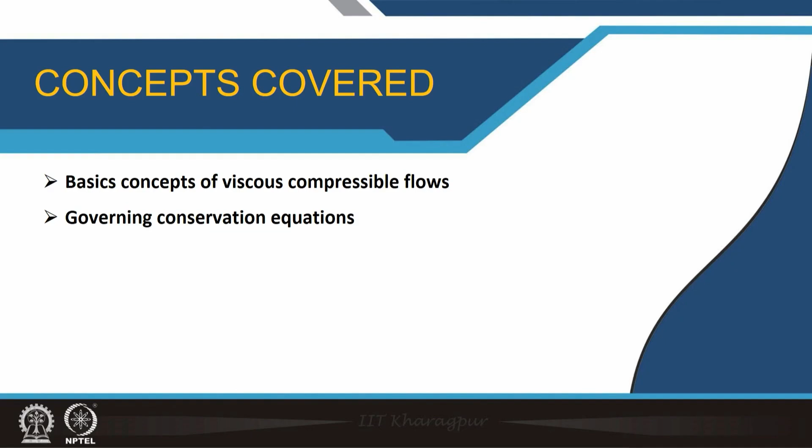With this lecture, we will begin week 4. We are going to look at the viscous compressible flow equations in this lecture. We are going to look at some basic concepts to begin with, and then we will move on to the governing conservation equations.

Before we move on with lecture 16, let us look at the topics of week 4. We will be looking at the governing equations of viscous compressible flow at length, and then we will derive the compressible boundary layer equations. We will discuss aerodynamic heating, and we will also look at shock wave boundary layer interactions.

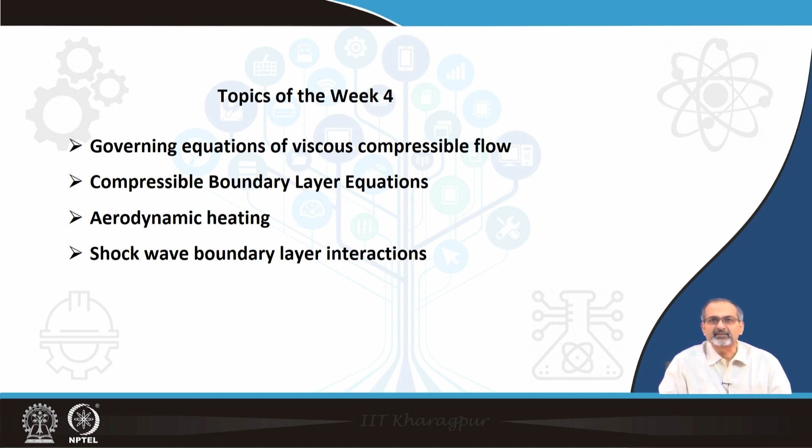To begin the topic, let us recall that at supersonic Mach numbers, the aspect of aerodynamic heating is insignificant. As the Mach number becomes larger, moving to the higher ranges of supersonic Mach numbers into the hypersonic or hypervelocity regimes, aerodynamic heating becomes very significant.

However, both aerodynamic heating, that is high vehicle skin temperature, and shear stress, that is high skin friction drag acting on the surface of the vehicle, become severe at hypersonic conditions. This is a significant point which distinguishes the hypersonic and hypervelocity regimes from the supersonic one.

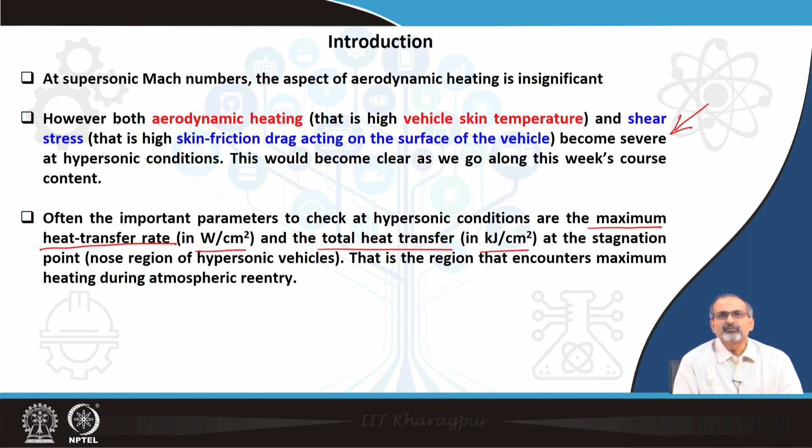This would become clear as we go along this week's course content, as we develop equations which address this issue. Often the more important parameters to check at hypersonic conditions are the maximum heat transfer rate given in watts per centimeter square, and the total heat transfer in kilojoules per centimeter square at the stagnation point, that is the nose region of hypersonic vehicles.

That is the region which encounters maximum heating during atmospheric re-entry conditions. Having taken note of these points, let us look at the shape of the vehicle. Why should the shape of the vehicle matter, and matter more so at hypersonic Mach numbers? Let us have a look at how it makes a difference.

A hypersonic wave rider is conceived as a hypersonic cruise vehicle configuration. This is more of a slender configuration. It needs a high value of lift to drag for efficient long range cruise, and it has a slender shape. These vehicles do not encounter very large wave drag, because if you have a slender shape, irrespective of the Mach number, the wave will not become a very strong bow shock or normal shock, and therefore the wave related drag may not be so high.

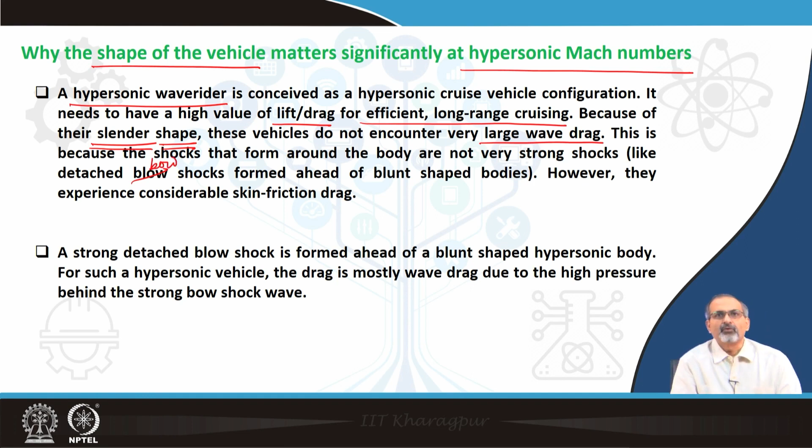The shocks formed around the body are not very strong, but not of the detached bow shock kind, which is formed ahead of blunt shaped bodies. However, such slender vehicles experience considerable skin friction drag. So if you have a slender body, the wave drag may not be so significant, but the skin friction drag becomes very large as free stream Mach numbers become large.

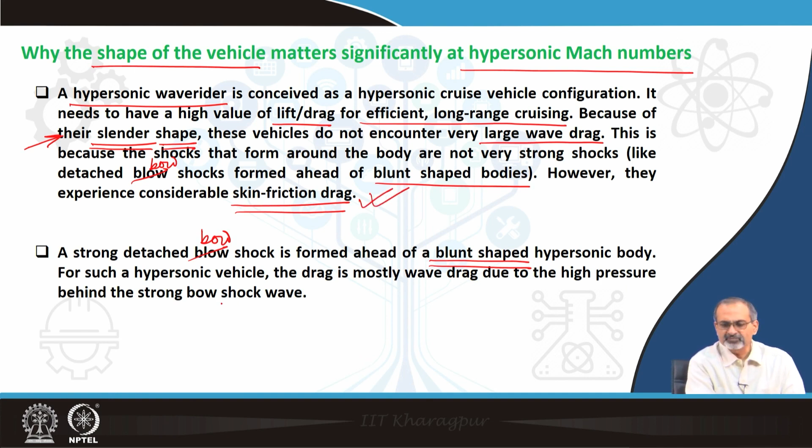A strong detached bow shock is formed ahead of a blunt shaped hypersonic body. For such a vehicle, the drag is mostly wave drag due to the high pressure behind the strong bow shock wave. So this is how a blunt shaped and a slender shaped hypersonic body respond to the flow. For the slender body, skin friction drag is significant; for the blunt body, wave drag is significant.

Low Reynolds number and high Mach number are basic ingredients of hypersonic viscous flow. High Mach number is of course evident, but we have not discussed the low Reynolds number aspect of hypersonic viscous flows. Let us initiate the discussion on that aspect.

Viscous dissipation and consequent heating. Let us try to understand what viscous dissipation is all about and how it is connected with aerodynamic heating. A hypersonic flow contains a very large amount of kinetic energy, due to a very high free stream velocity, which we are already aware of. Now when this flow occurs over a wall or vehicle surface, it is slowed by the viscous effect which occurs within the boundary layer formed adjacent to the wall.

So when the flow occurs, all actual flows manifest the viscous effect within a boundary layer formed adjacent to the wall or surface of the vehicle, where essentially the flow comes to a halt next to the wall. While within a very short distance, which we typically indicate as boundary layer thickness, the velocity goes from zero to a very high free stream velocity, which we generally indicate by u infinity.

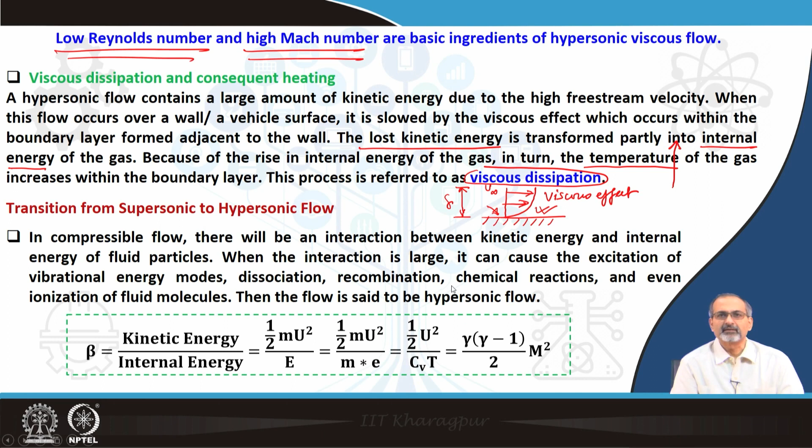This is a very important term in high speed flows. You have to remember it very meticulously.

Now recall, in an earlier lecture in week 1, we were talking about transition from supersonic to hypersonic flow, and we had introduced this parameter beta, where we said it is basically a ratio of kinetic energy and internal energy. If you put the respective expressions for it, this is how it will work out, and then here it is in a specific internal energy sense, and you replace it by the specific heat at constant volume times the temperature, and thereby finally come up with an expression which is dependent on gamma and the Mach number of the flow, the square of the Mach number importantly, which means this beta is going to increase quadratically with Mach number. As Mach number goes up, it is going to non-linearly increase.

Of course, gamma would also have some bearing with Mach number. Even if you consider it to be constant, you see a clear quadratic relationship between beta and M.

Now, in compressible flow, there will be an interaction between kinetic energy and internal energy of the fluid particles. When the interaction is large or severe, it can cause the excitation of vibrational energy modes, dissociation, recombination, chemical reactions, and ionization of fluid molecules which are there in the gas, and this is another very major aspect of aerodynamic heating. We are going to discuss more of this in the later lectures, the reactions part of the flow.

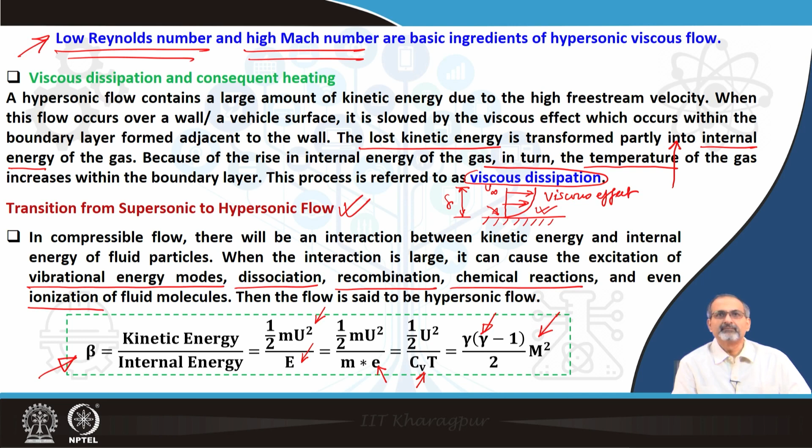So we made a comment in the previous slide, if you recall, right at the top of the slide we said low Reynolds number, and that could also mean largely laminar flow. Now, with a thicker boundary layer here, we will try to understand the other implications in due course, but before we go ahead, let's have a quick look at the Sutherland's law.

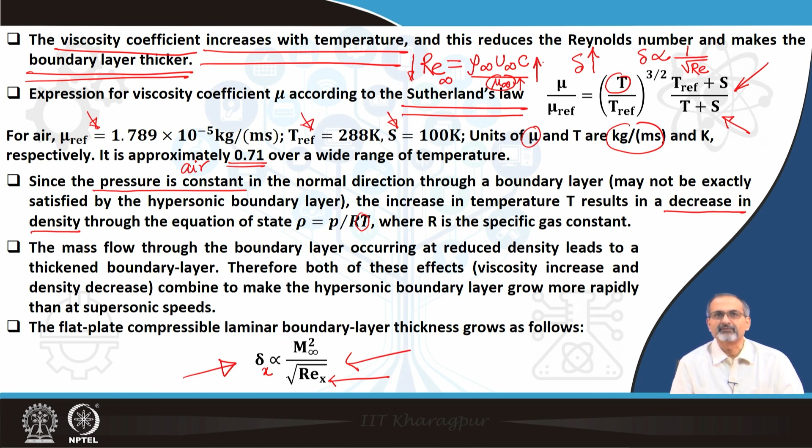The thick boundary layer in hypersonic flow produces a strong displacement effect on the inviscid flow which lies beyond the boundary layer. So, there comes a very strong displacement effect.

Now, as you know, when the flow is developing on a flat surface like this, this is the boundary layer thickness, and this is how it is growing gradually. You can also calculate the displacement thickness corresponding to this boundary layer, and that is of a lot of significance in terms of figuring how far the boundary layer flow displaces the outer inviscid flow, and that is precisely what is emphasized in this point.

A large displacement thickness causes a given body shape to appear much thicker than it actually is, because if the body shape is defined as y equal to f(x), when it is immersed in a viscous flow, the y as it appears to the flow would not be f(x) alone, it would be displaced by an amount of this order. So there will be a displacement thickness adding on to the geometric shape of the surface, and that displacement thickness is also a function of x, the length from the leading edge of the body. So, it appears thicker than it actually is.

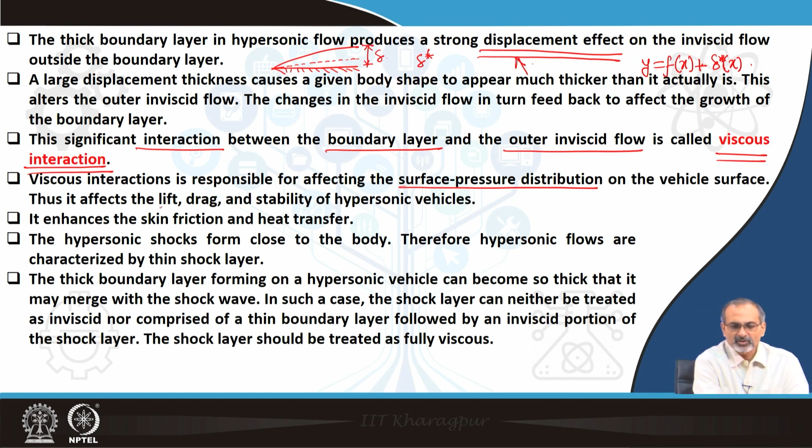Viscous interactions, how do they affect things? They are responsible for affecting the surface pressure distribution on the vehicle surface, and consequently, if you integrate an altered surface pressure distribution, you will see a change in lift, drag, pitching moment, and therefore stability of the vehicle. It also enhances skin friction and heat transfer.

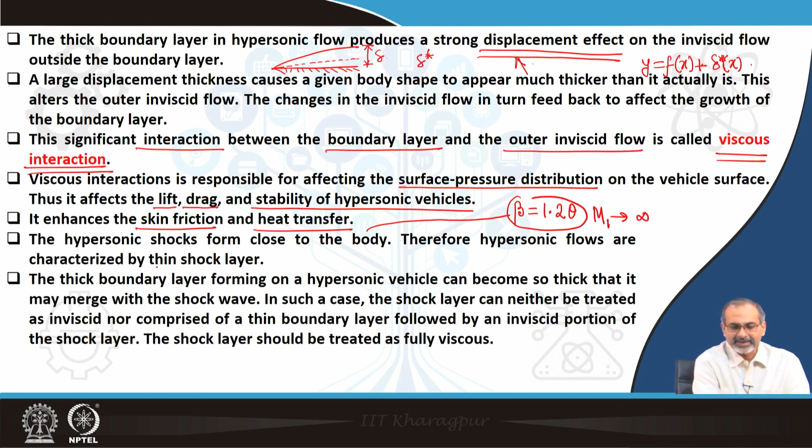The hypersonic shocks, which are known to form very close to the body, in this context you may recall the other day we were talking about beta being of the order of 1.2 times theta in the limit M1 tending to infinity, which basically indicated that the shocks form very close to the body. Therefore, hypersonic flows are characterized by thin shock layers.

Now, when you have a thick boundary layer forming on a hypersonic vehicle and it becomes so thick that it may merge with the shock wave, in such a case the shock layer can neither be treated as inviscid, nor comprised of a thin boundary layer followed by an inviscid portion of the shock layer, because the shock layer should be treated as fully viscous in that case.

So, what we are talking about is that if you have a body immersed in a hypersonic flow with a very thin shock layer between the shock and the body, while you have a significantly thick boundary layer forming on the body, then it may so happen that you do not have the shock layer in the inviscid form anymore. So even the inviscid equations that we use to analyze the shock relations and so on become questionable, because it is highly affected by the viscous effects of a much thickened boundary layer.

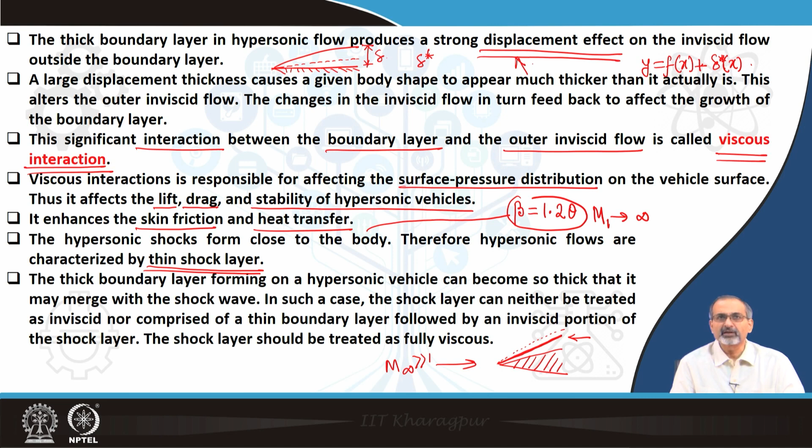This, of course, is shown in a highly amplified manner, where the boundary layer thickness is way larger than the shock layer, but the point we are trying to make is that they could be of the same order.

From altitude velocity maps, we can show that laminar flow occurs at higher altitudes and turbulent flow at lower altitudes. So, what are these altitude velocity maps? We are going to visit them in detail in some of the later lectures.

When we look at re-entry bodies typically re-entering the Earth's atmosphere, they move through the entire thickness of the atmosphere till they land on the surface. This altitude could be of the order of 100 kilometers or more, and velocities are much higher at that altitude, coming very close to zero by the time it touches down, which means at higher altitudes you have much higher velocities.

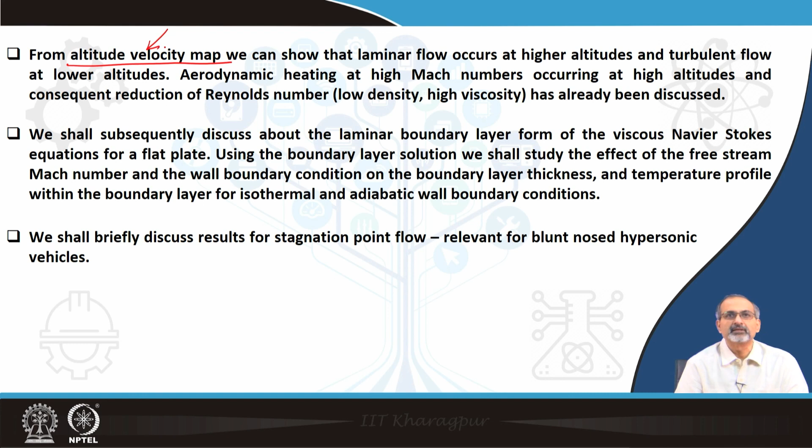The velocity is reduced as the altitude reduces, and therefore you could generate altitude velocity maps. Through suitable calculations, we can argue that mostly laminar flows would occur at higher altitudes and turbulent flows would occur at lower altitudes. Now, aerodynamic heating at high Mach numbers occurring at high altitudes, and the consequent reduction of Reynolds number due to low density and high viscosity, has already been discussed.

We shall subsequently discuss the laminar boundary layer form of the viscous Navier-Stokes equations for a flat plate. Using the boundary layer solution, we shall study the effect of the free stream Mach number and wall boundary condition on the boundary layer thickness, and the temperature profile within the boundary layer, for two different kinds of thermal boundary conditions, namely isothermal and adiabatic wall boundary conditions.

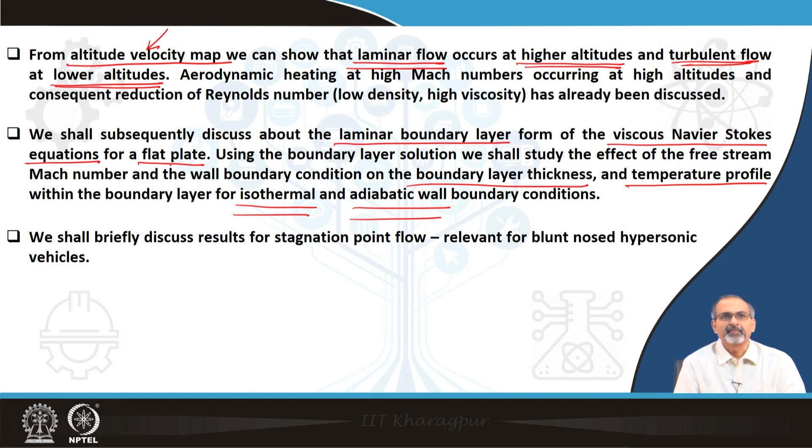So for that we have to derive the laminar boundary layer form of the viscous Navier-Stokes equations, which we will take up soon, and we will confine it to the flat plate case. We shall briefly discuss results for stagnation point flow relevant for blunt nosed hypersonic vehicles. However, we will not derive them, we will only look at the final results.

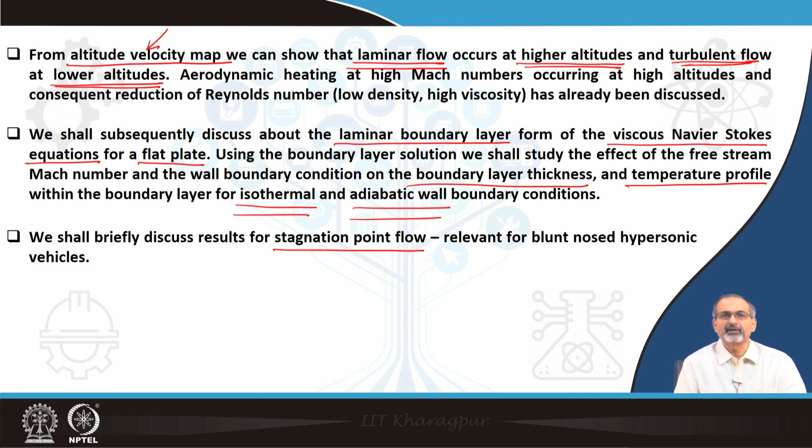These are familiar equations which you have learned in an earlier week, but it is a good time to revisit them again. Since we are going to discuss the continuity, momentum and energy equations once more in the context of the compressible Navier-Stokes equations, and those being reduced to the boundary layer form, here is a quick recapitulation of those equations.

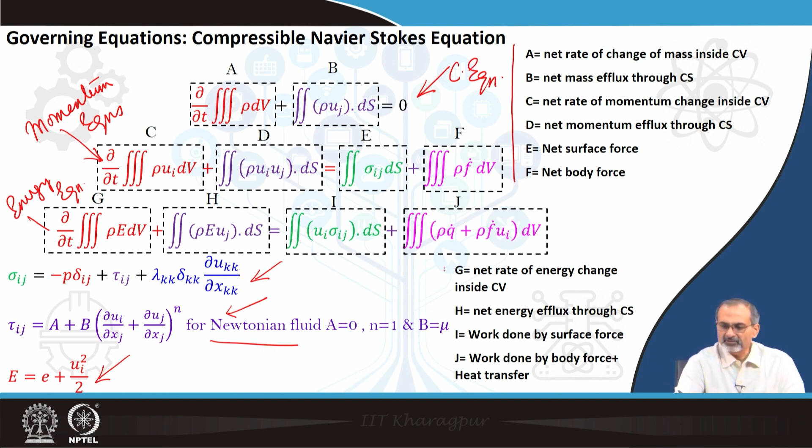Now, you may recall that we had a lot of forms. Here, when we look at the next few slides, you will see that we would prefer to go ahead with the infinitesimal fluid element approach rather than the finite control volume approach. The finite control volume approach we have used for the shock wave equations, for example, but here we prefer to do the analysis with the infinitesimal fluid element, and therefore we are going to use the derivative forms, taking an Eulerian perspective of that.

Some of these terms will not be relevant for us, which we will discuss in due course. For example, we are not going to consider body force terms.

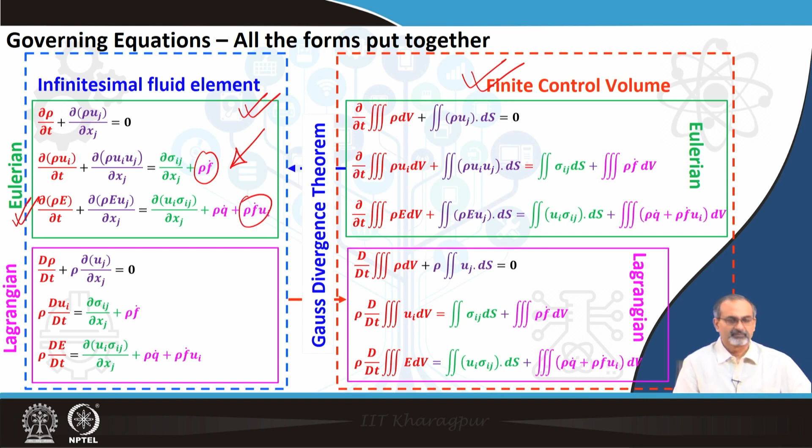Looking at the momentum equation to begin with, you may be wondering why we did not look at the continuity equation, because I would like to give that as a homework problem for you. So here we are again simplifying the momentum equation. First of all, we are looking at it as the x component instead of all the components represented in a compact manner through the indicial approach. Here we are splitting them into components and trying to analyze them.

We are going to assume the flow to be steady, two dimensional, occurring in the xy plane, of course viscous, compressible, and written in a differential form, which I already mentioned. Additionally, we are going to neglect the normal stress component sigma xx and the body force terms.

The sigma xx term may not be so very relevant for us here, especially in the boundary layer context, and therefore we are keeping it simple. As a consequence, you may recall that this is connected with your sigma xy, and therefore the dimensional form of the equation will look like this.

Now we would like to non-dimensionalize it, and for that we introduce a couple of non-dimensional terms, as you can see here. So rho dash defined as rho by rho infinity, u dash as u by u infinity. We are using the free stream values here for non-dimensionalizing these parameters.

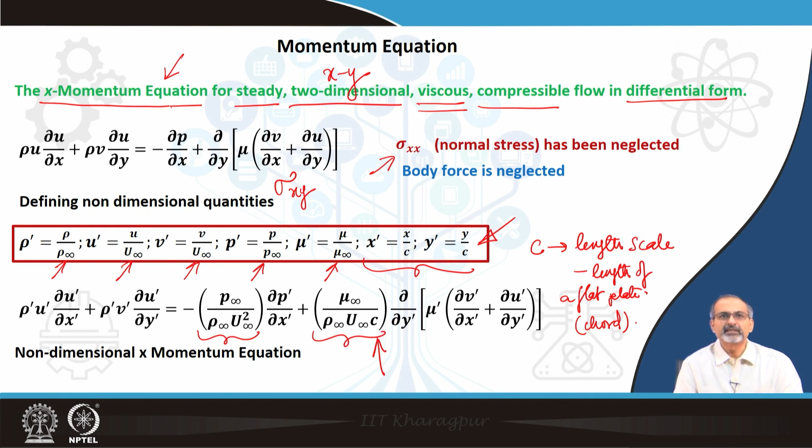So they are written in terms of the dash terms. Additionally, there are some coefficients associated with the pressure gradient term and the viscous term that you can see on the right hand side.

Now if you look deeper into these terms, you find that the P infinity by rho infinity u infinity square coefficient associated with the pressure gradient can finally be represented in the form of 1 by gamma M infinity square. Gamma, of course, is the ratio of specific heats. The M square, which is basically the square of the Mach number, the free stream Mach number.

What is it indicating? It is basically proportional to kinetic energy of the flow versus the internal energy of the flow. And the Reynolds number, which shows up from the coefficient associated with the viscous term, as 1 by Re infinity, that, as we may recall, is a ratio of inertia force and viscous force.

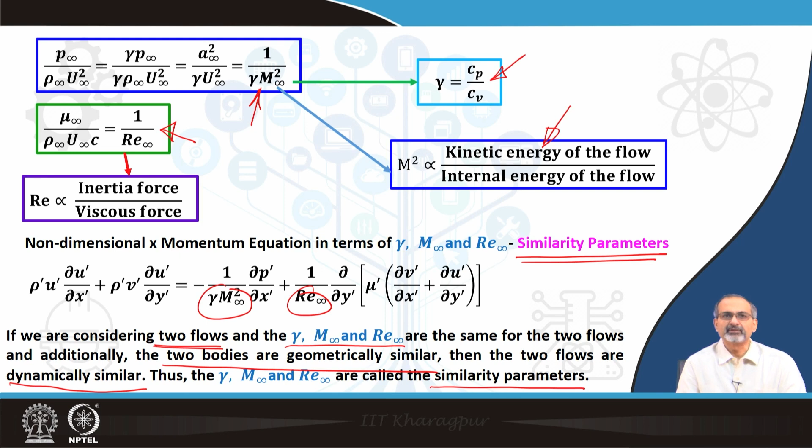Therefore we introduce these terms here in the coefficients. These are called the similarity parameters. So if we are considering two flows, for example, which are identical in terms of gamma, M and Re, and additionally the two bodies are geometrically similar, then the two flows are considered to be dynamically similar. Thus, gamma, M infinity and Re infinity are called the similarity parameters because they bring in the similarity between the two flows in addition to the geometrical similarity.

Now, as I mentioned earlier, following this approach, you should be able to derive the non-dimensional continuity equation, which is indicated here. Additionally, you should also be able to work out the non-dimensional y momentum equation. As you can see, the coefficients which we saw for the x momentum equation come up here even in the y momentum equation.

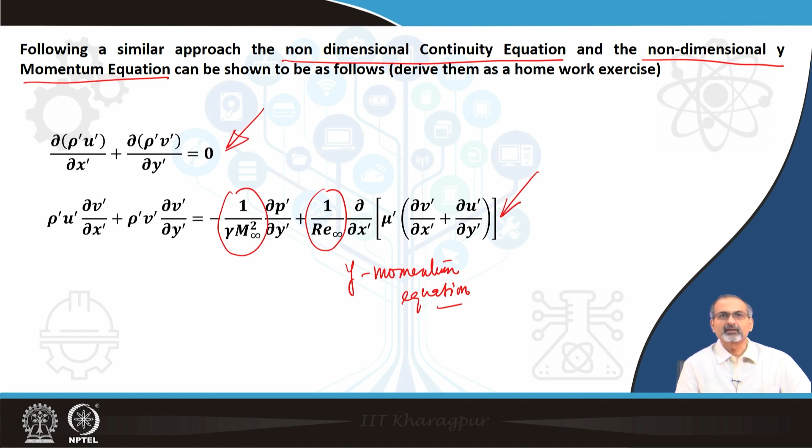However, as far as the continuity equation is concerned, there are no such collection of terms. Again, these collection of terms, of course, are non-dimensional.

If you look at the energy equation, for example, the energy equation shows like this. We are neglecting body forces, we are neglecting the volumetric heating, and we are also neglecting the normal stress terms sigma xx and sigma yy. Heat transfer through thermal conduction is considered.

So if you bring in all these aspects, additionally remember we also have the assumption of steady flow, which means you will not have a time dependent term on the left hand side. So then you have these two terms on the left hand side followed by the conductive heat transfer terms and the additional terms on the right hand side involving the stresses.

So now, in addition to the non-dimensional terms which we had earlier introduced, if we bring in some more non-dimensional terms in terms of the internal energy, in terms of the square of the velocity and thermal conductivity and temperature, then you should be able to non-dimensionalize each one of the terms of the energy equation.

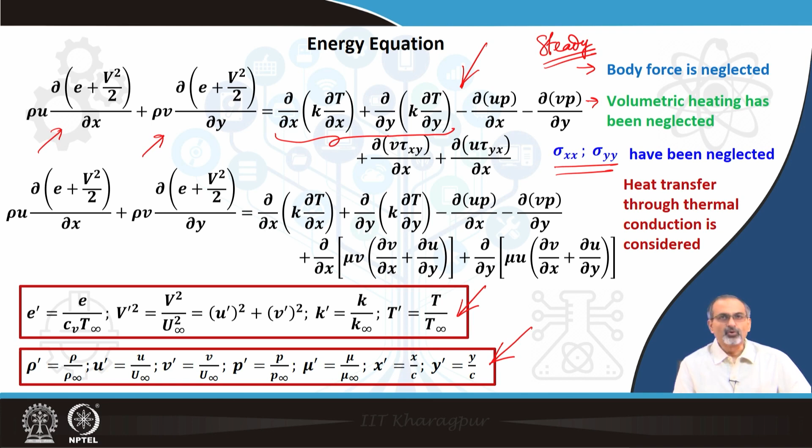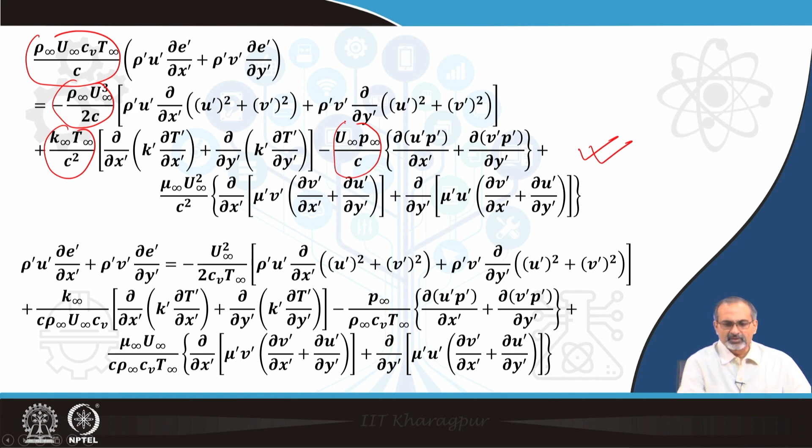So if you go ahead with that process, then the energy equation first can be non-dimensionalized like this, where you will have a couple of coefficient terms coming up here, and then you should be able to finally convert them in terms of some coefficient terms involving a set of similarity parameters, where a new important similarity parameter will join, which is called the Prandtl number.

It is nothing but the energy dissipated by friction divided by energy transported by thermal conduction. It is proportional to these two effects, and Prandtl number happens to be a property of the gas. It is different for different gases, and for non-reacting gases it is a function of temperature only. For chemically reacting gas, it is dependent on local chemical composition.

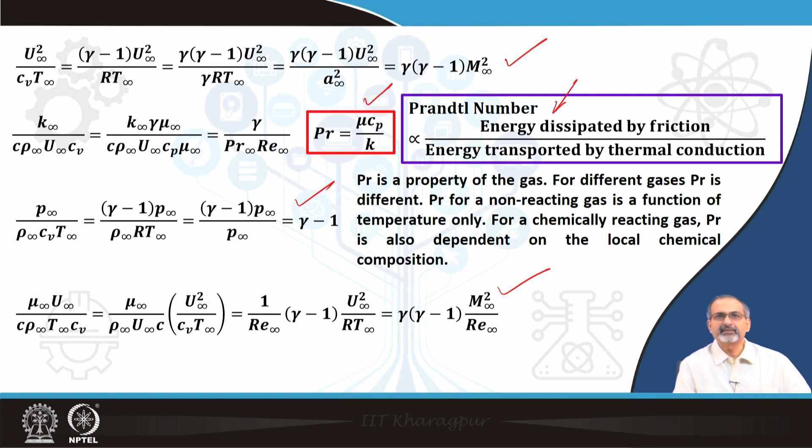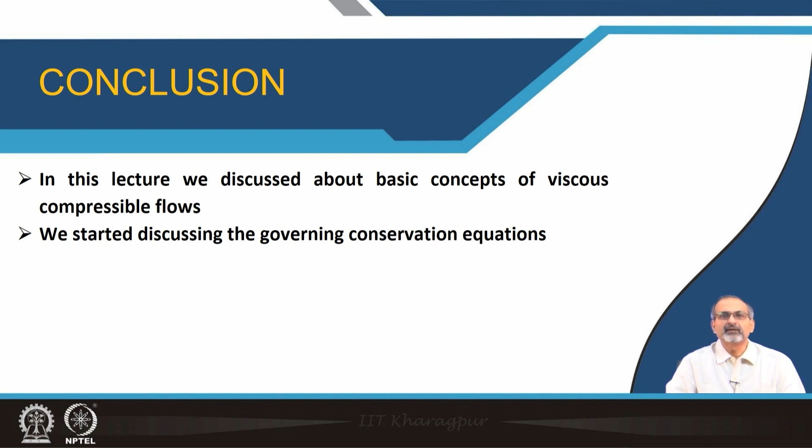So we will revisit the energy equation once again in the next lecture. Just to recapitulate, in this lecture we discussed the basic concepts of viscous compressible flows. We started discussing the governing conservation equations. Thank you.